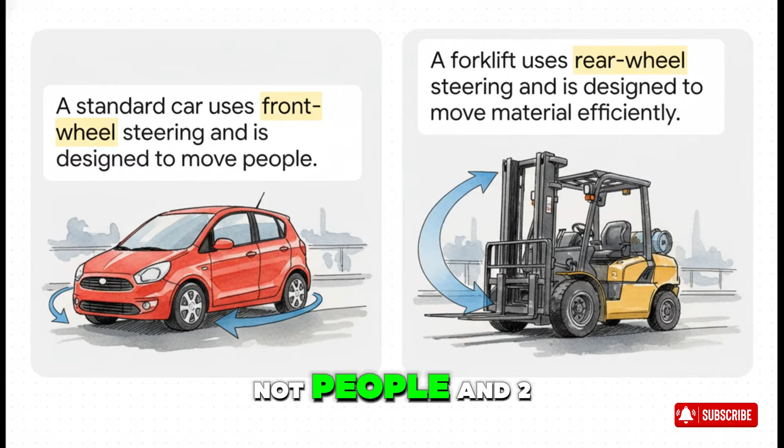The big difference? Two things, really. One, its job is to move stuff, not people. And two, and this is the big one, it steers with its back wheels, not the front like a car. That's what makes it so nimble, but it also means the back end swings out wide, which is something you always have to watch out for.

Okay, here's the game plan for today. We'll start with the basics, then get you settled in the cab. After that, we'll cover the pedals and steering, then the hydraulic levers for all the lifting action. And finally, we'll wrap up with how to park and shut down safely. Sound good? Let's go. All right, Section 1, your first forklift.

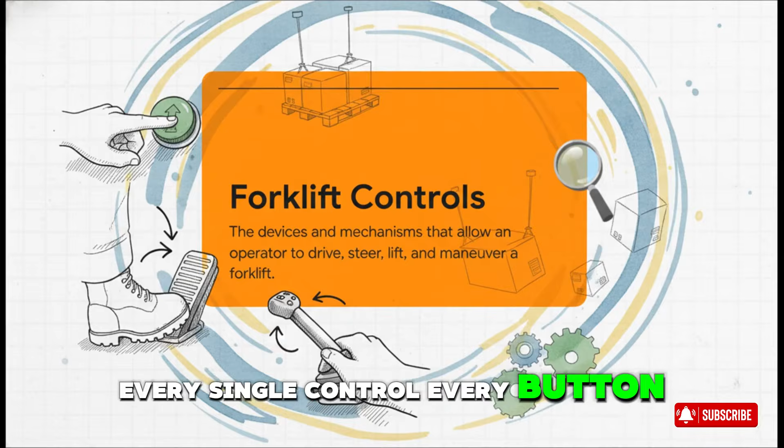So, before we even think about touching a single control, let's get a handle on the big picture. What are all these things actually for? You can think of it like this. Every single control, every button, every pedal, every lever is part of one big team. And they all have the same goal, to give you, the operator, the power to drive, steer, and lift stuff safely and efficiently. It's all about control and precision.

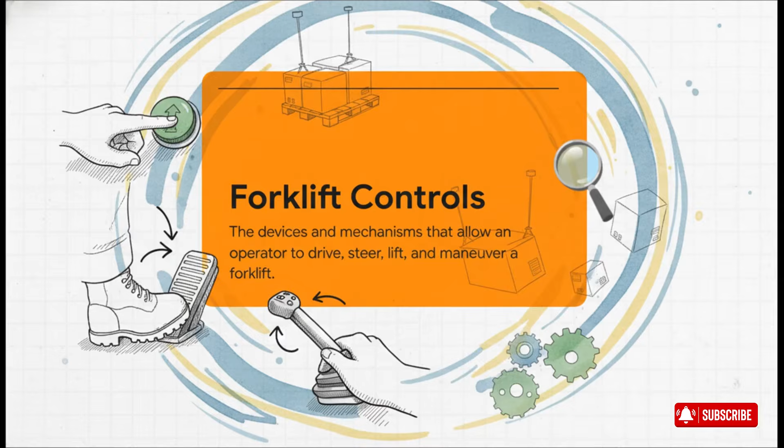Okay, let's hop in the driver's seat. Section 2, inside the operator's cab. So, picture this. It's your first time. Your first instinct might be to just jump in, find the key, and fire it up, right? Hold on a sec. Safety starts before you even start the engine. There are 3 super important things you gotta do first.

Step 1. Always get on from the left. Use the handholds. They're there for a reason. And whatever you do, never use the steering wheel to pull yourself up. It's not a grab bar. Step 2. Buckle up. Seriously, that seatbelt is your number 1 safety feature. And step 3. Find the key. It's almost always on the right side of the steering column, pretty much where you'd expect it.

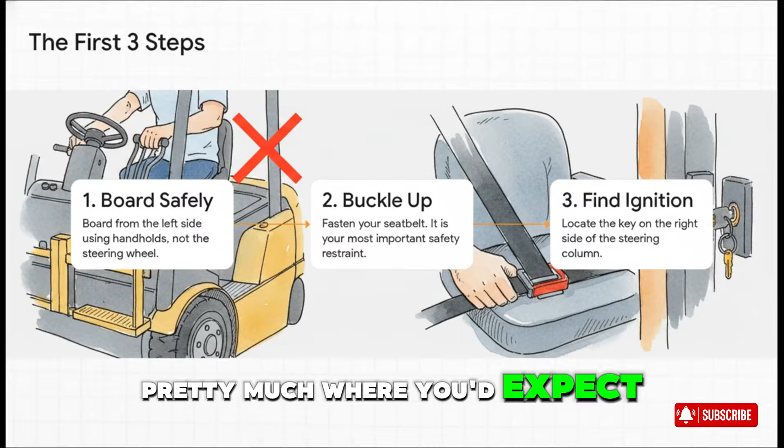All right, Section 3 is all about pedals and steering. You're in, you're buckled up. Now, how do we actually get this thing moving? Let's look at what's at your feet and in your hands. Some of this is going to feel familiar, but some of it, well, it's a whole different ballgame.

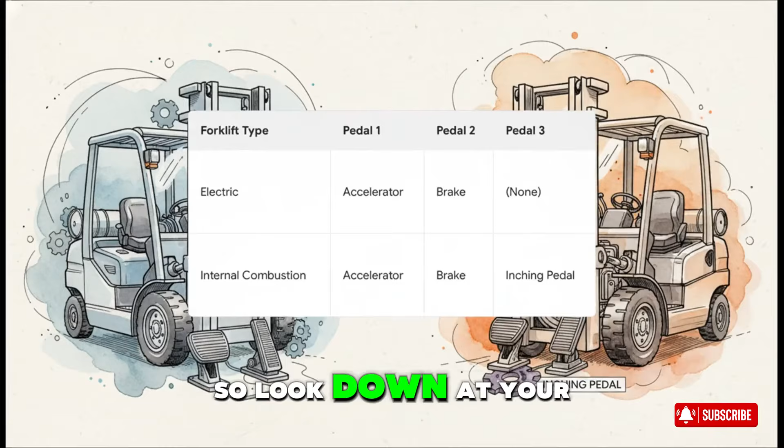So look down at your feet. You're going to see one of two things. If you're an electric forklift, it's super simple. Gas pedal, brake pedal, kind of like an automatic car. But if you're in an internal combustion one, you might see a third pedal, all the way on the left.

That, my friends, is the inching pedal, and it is a total game changer. So what does this magic pedal do? Well, it's kind of like a clutch. When you press it down, it disconnects the transmission. This is awesome because it lets you rev the engine to get more power to your forks for lifting, but without the forklift shooting forward. It's the key to making those super slow, precise movements when you're lining up with a pallet or lifting something really heavy. And what about going forward and backward?

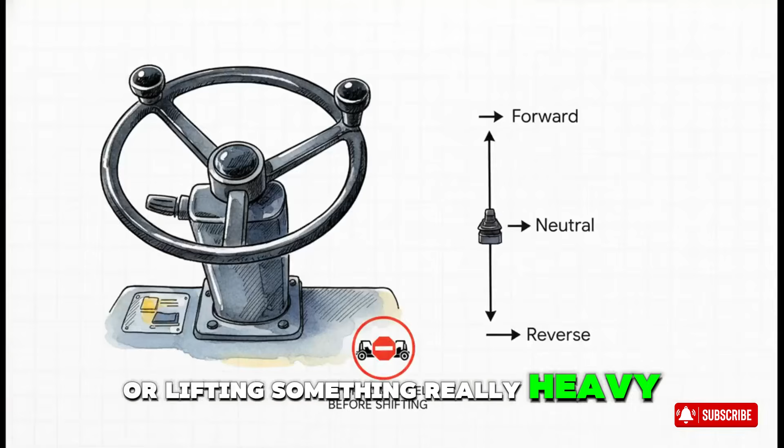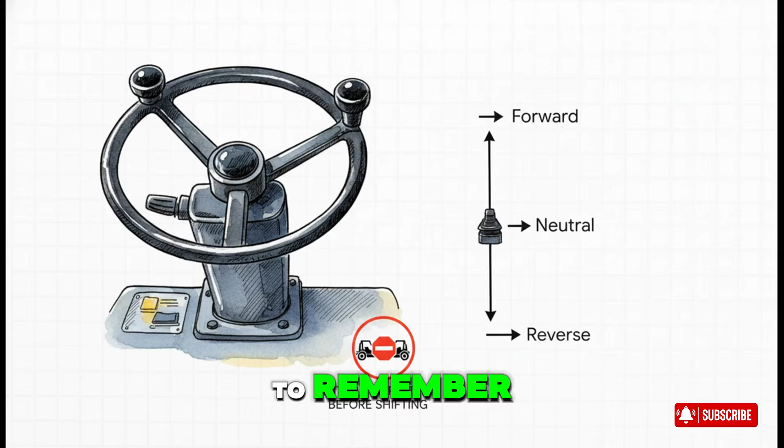Easy. There's a lever, usually right there on the steering column. You push it up for forward, pull it down for reverse, and stick it in the middle for neutral. The golden rule is to always come to a complete stop before you switch directions. Don't do it, and you'll wreck the transmission.

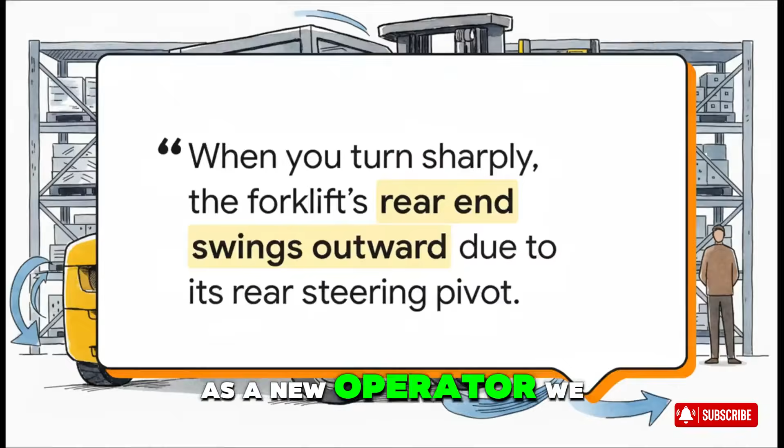Now this right here is probably the most important thing you need to understand as a new operator. We keep saying it's not a car, right? Well, this is the biggest reason why. The back wheels are what steer, which means the whole back end of the forklift swings way out when you turn. You have to always know where that rear end is going, or you're going to hit something - racks, pallets, or even people.

Okay, on to Section 4, the hydraulic levers. We figured out how to drive. Now for the fun part, learning how to lift. This is where the real magic happens. These levers are the heart of the whole operation. Just think of them as the brains, telling the muscle where to go. Every time you move a lever, you're basically telling high-pressure fluid, hey, go power up those big cylinders and move the forks. It's all about directing that hydraulic power.

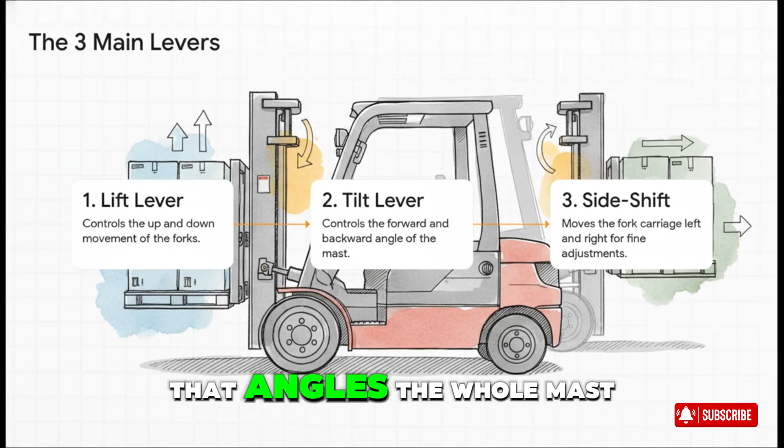On your typical sit-down forklift, you're going to have 3 main levers right next to you, usually on the right. Lever 1 is for lift - that's your up and down. Lever 2 is for tilt - that angles the whole mast forward and backward. And lever 3, which is super useful, is the side shift. That lets you move the forks left and right without moving the whole machine.

So why are there 3? Well, they all work together. You use the lift lever to get the forks up. Then, and this is super important, you use the tilt lever to pull the load back towards you - that keeps it stable while you're driving. You only tilt forward when you're ready to put the load down. And that side shift? Oh, it's a lifesaver. It lets you make those tiny little adjustments to line things up perfectly without having to back up and try again.

Okay, we're on the home stretch, our final section: parking and shutting down. And look, the job isn't over just because you've dropped the load. Getting the forklift shut down safely is every bit as critical as operating it. This is a 4-step process you should just burn into your brain.

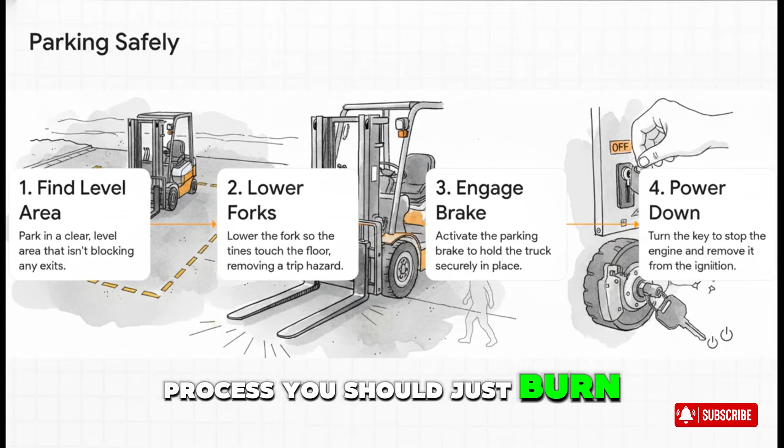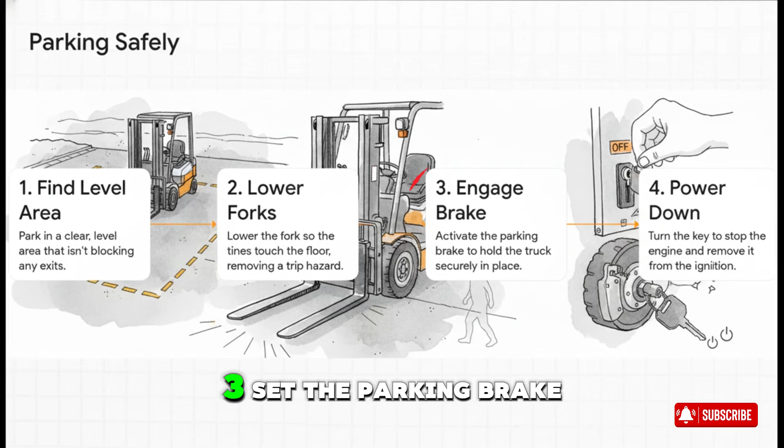1. Park it in a designated spot on flat ground. 2. Lower the forks all the way down until they're flat on the floor - that gets rid of a huge trip hazard. 3. Set the parking brake. And 4. Kill the engine and take the key out. Every single time.

So, after all this, what's the big takeaway? Well, knowing what all the buttons and levers do is just the beginning. That's the easy part. Becoming a really good, safe operator comes from practice. It's about getting a feel for the machine and, more than anything, being totally aware of everything happening around you at all times. And that leads me to a final thought for you. We've spent all this time talking about the controls inside the forklift, but the best operators know that what's happening outside the cab is just as important.

So here's my question for you: before you even turn that key, what's the very first thing you should be looking for in your environment? Just something to think about.